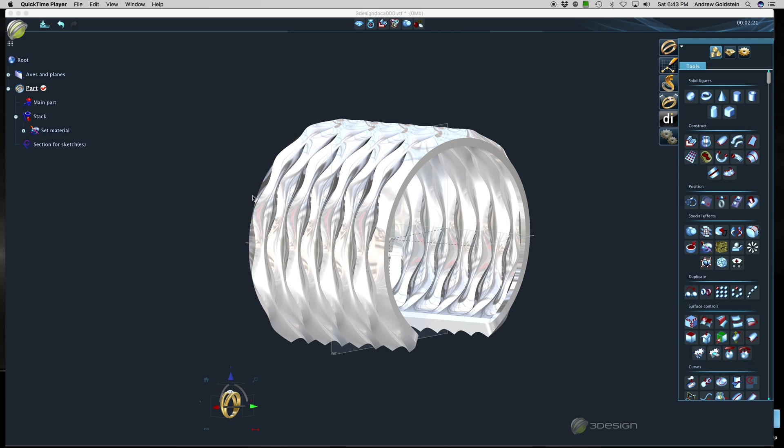Andrew from Zina Sterling Silver, and you're looking at a cuff from my latest Desert Wave collection. This has been created exclusively in 3Design and printed on the Formlabs 2 printer and then cast here in my factory. So I'm going to show you quickly how I made this.

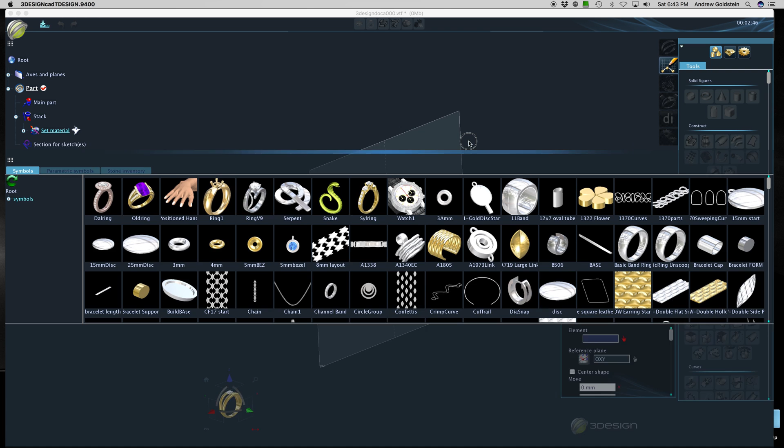Let me go ahead and hide this. I like to work in 3Shaper, so I will do most of the demonstration in shaper, but first I have to create the bracelet. The way I did that was I already have a bunch of these symbols. This right here is called cuff rail, and that's basically a line that shows me the dimensions of the bracelet that I want. But this is laying flat on this plane.

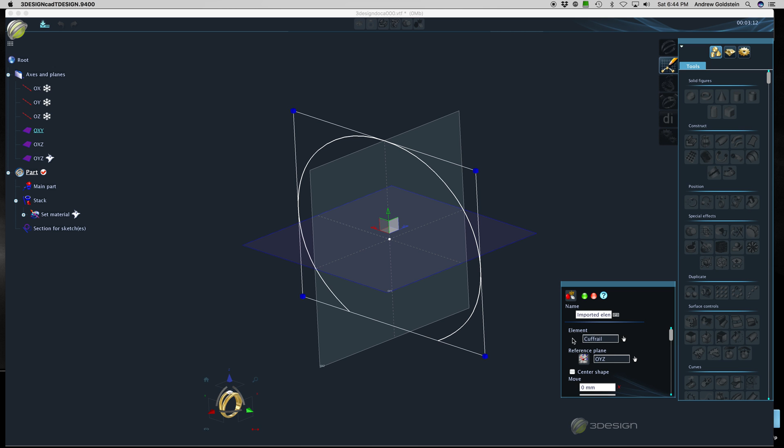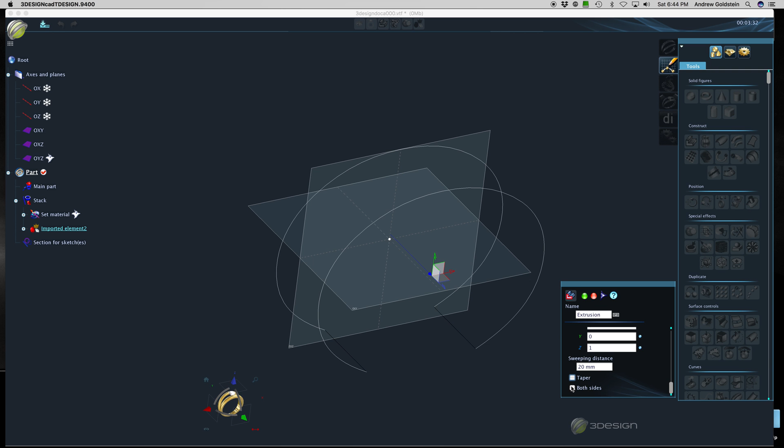I don't want it in the OXY plane, so I'm going to choose a different plane. If I open my axes and planes here, I'll put it in the OYZ plane. Now you can see it's in a different plane. So here's my cuff rail, and I'm going to extrude that to be 40 millimeters wide, but I'm going to do 20 millimeters and do it on both sides, so that way it stays true to the center of the 3D universe. You can see that by the plane right here that's bisecting the curve. So this pretty much resides at 0, 0, 0, which is the center of the 3D universe.

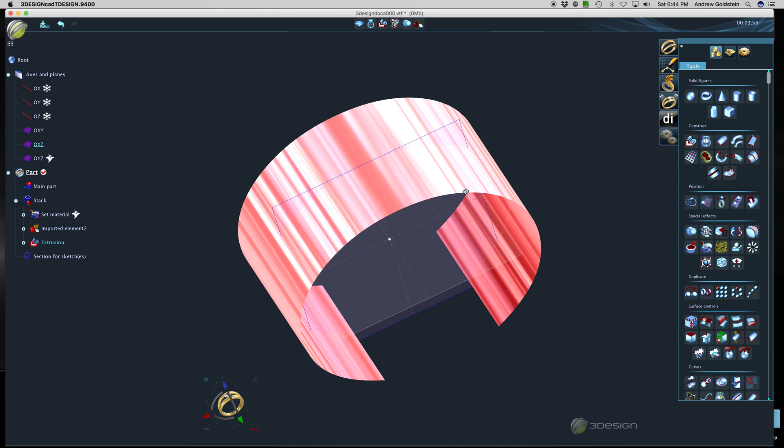So if we do anything to it, that helps with keeping symmetry and things like that. So anyway, this is a surface. There is no depth to it. It can't be printed. It's strictly a surface.

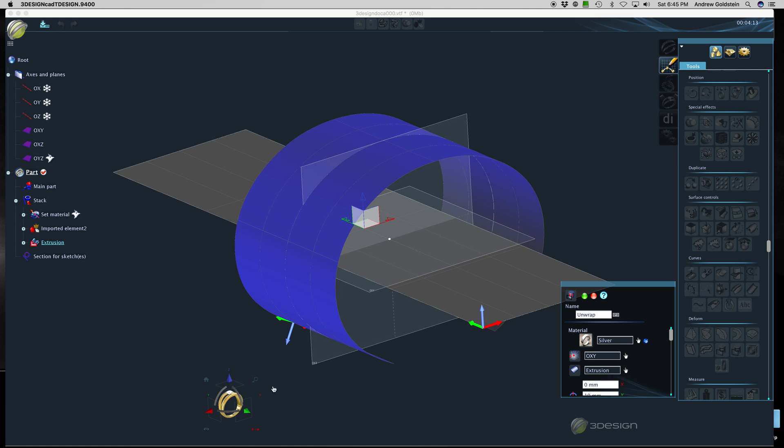What I'm going to do now is unwrap that surface using my UV unwrap tool right here, and basically it takes the round. I'm going to center it again in the universe. I'm going to rotate that 90 degrees so it lines up with the piece as I'm looking at it. And basically now we have an outline of what you can see.

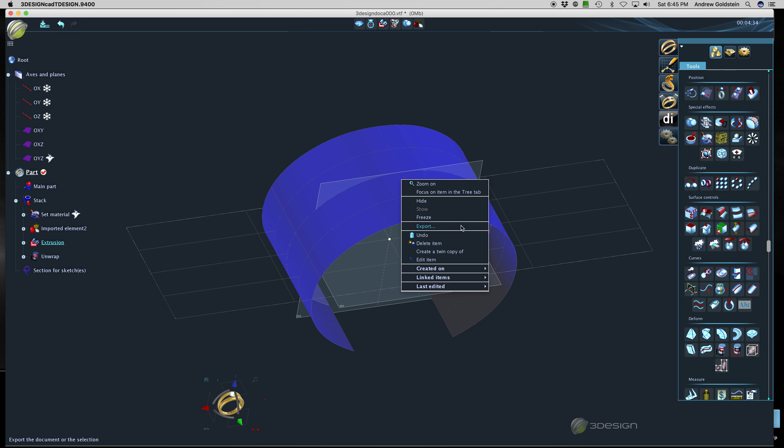I don't need this extrusion anymore, so I'm just going to go ahead and delete that item, and my unwrap will stay. What I'm also going to do is turn off my planes by hiding them. I don't like to see them because it kind of messes me up a little bit. The less that you're looking at on the screen, the better it's going to be.

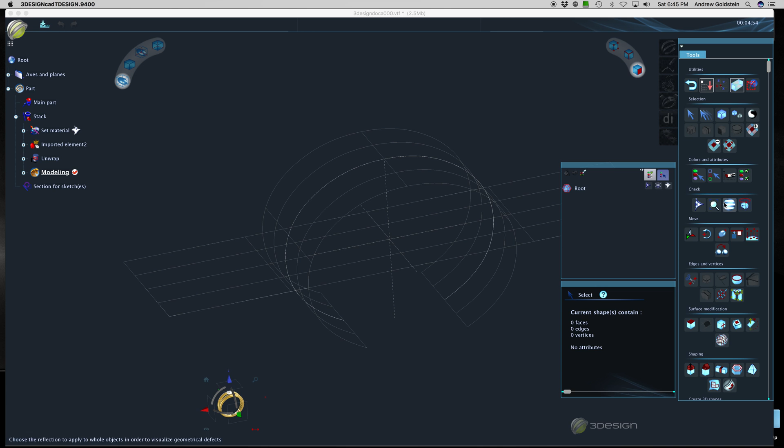So now what I'm going to do is go into shaper. It gives me all of these tools here on the side. What I'm going to do is create a box. I already know that the box is -- well, now that's on the wrong plane. We'll put that... okay, now there it is. So we've changed the orientation plane that it's on.

And I made it specifically 10 millimeters long, 4 millimeters wide, and 1 millimeter high. This is strictly to show you how I make the pattern. This is obviously going to be too small to make the bracelet.

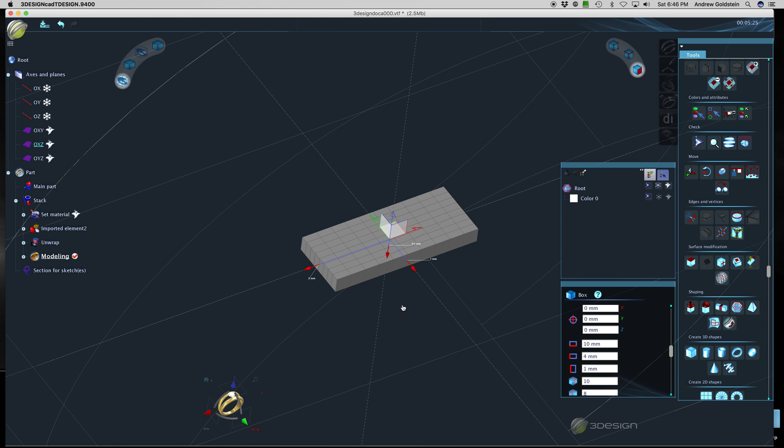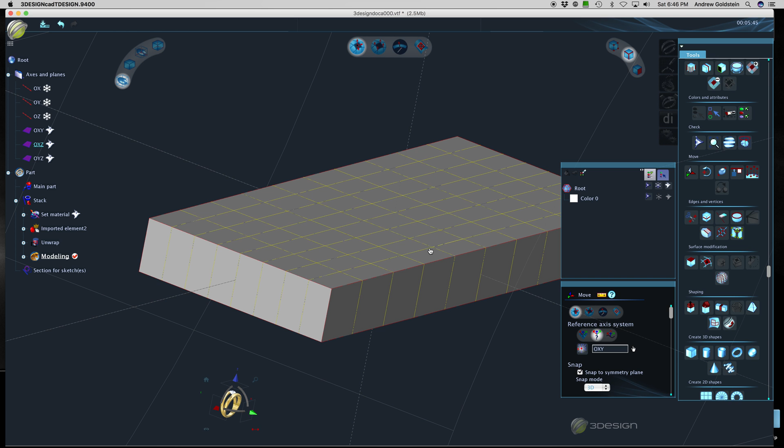So here what I'm looking at is there are 3 modes. This is where you can look at surfaces right here, this square. Here is where you can look at edges, and what you can see here is that some edges are red and some edges are yellow. That tells me red edges are hard, yellow edges are soft, and then here this is points. And this is a shaper tool, and you'll see why I like that in a second.

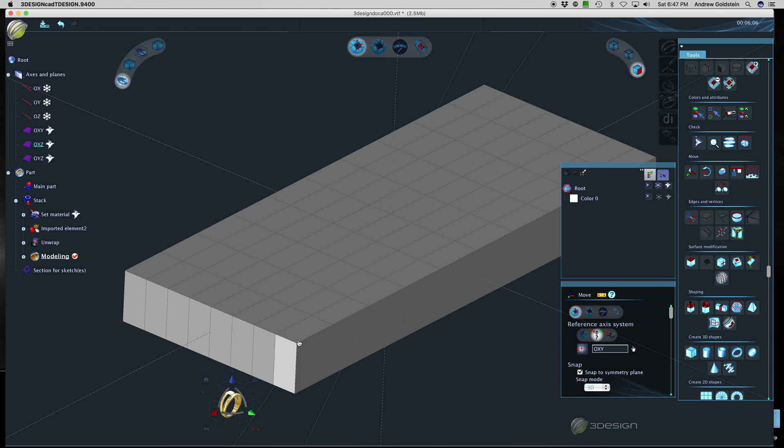So what I'm going to do is I'm only concerned right now with the top plane. Basically what I want to do is get the rest of it out of the way. So what I like to do is take this top plane, choose all of the little squares here on the top plane using this multi-choosing tool. And I'm going to add a color to that. I'm going to make that yellow for the time being.

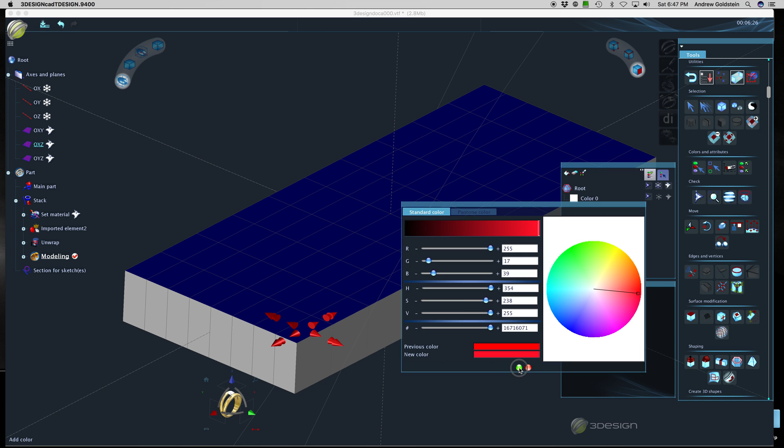Actually, you know what? I'll keep it red. So now you can see when I click off it, the top plane is all red and everything else is this whitish gray color. That allows me to turn off the whitish gray, and then any tools that I use will only affect whatever's visible. So now what you can see is, even though it'll be red on red in a second, all of these lines, these edges, are yellow, which means they're soft. Well, in order to create this pattern, I need to start moving some of these around.

So what I'm going to do is double click here, and it's going to choose the edge all the way across. Then I'll hold down my command key and double click this one, and this one, and this one. So now I've chosen every other line.

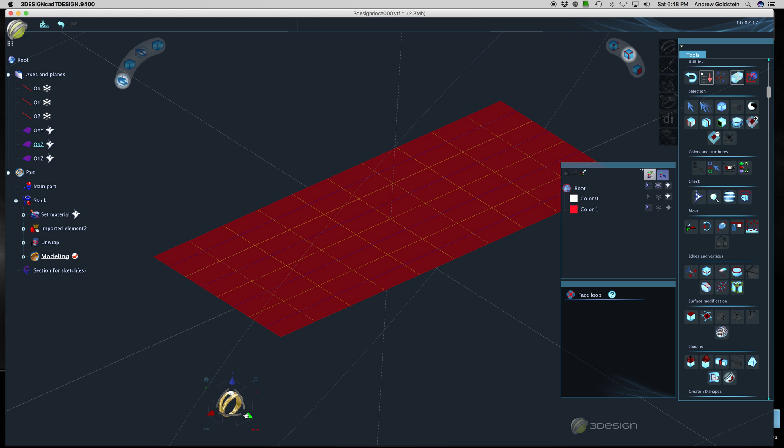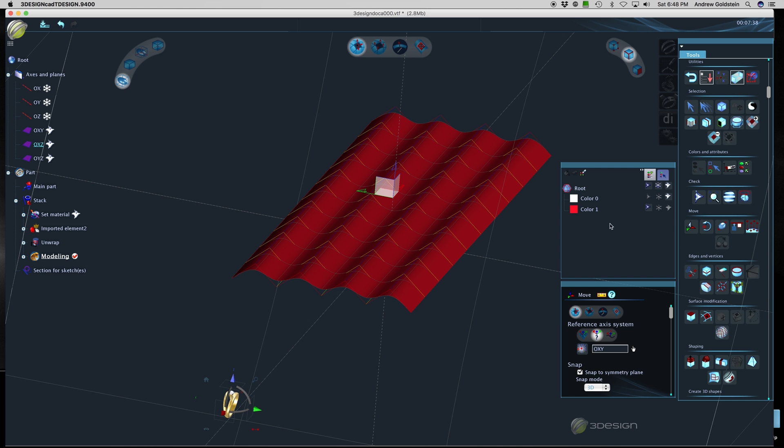Now I'm going to go to my side view. It doesn't look like anything, but once I turn on my move tool, I can actually move just those lines that we've selected up. You can see they're kind of bumpy now because the lines in between every other line have been raised off a different plane. If I turn back on the white, you can get a better idea of what's going on. But these are still active selections.

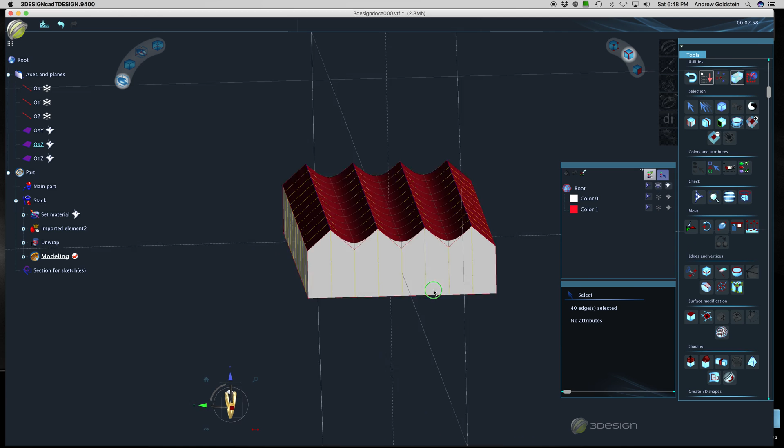There's a tool right here which is create sharp edge. I click that once, and now I've got these nice sharp edges. So that's step one of creating the desert wave pattern.

Step two is now moving the points. I'm going to look directly from the top. What needs to happen here is I need to be able to create the waviness. So the way I do that is I select these two points here, holding the command key down, and then I skip over every other set of points. Once I have all of these chosen, now I'm going to use my resize tool, which is right here in the middle.

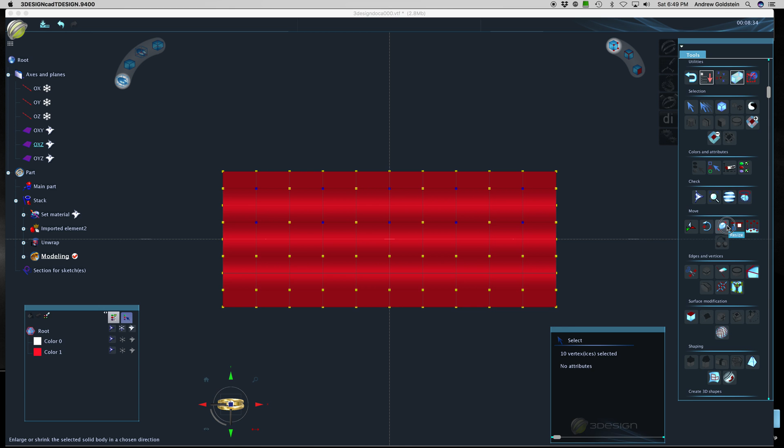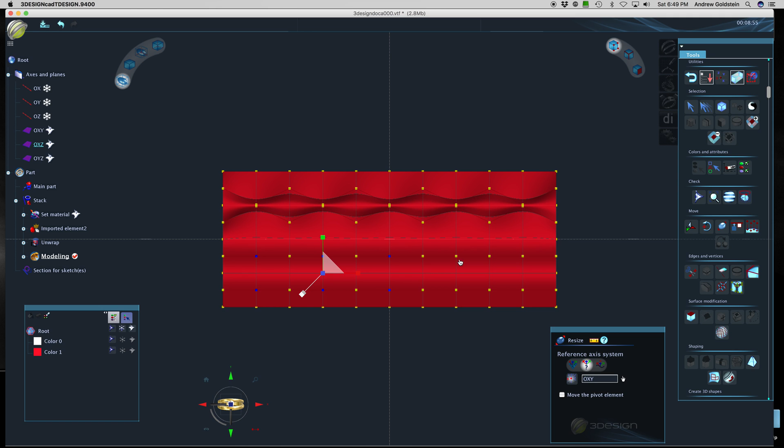This green toggle will only move them in the up and down position, and I bring that in. You can't see it well, but I click on it and drag down, and that brings those points together. I'll do the same over here, holding the command key down and skipping over every other one. Once I have them all selected, I'll click the green toggle, drag it down, and bring those together. Now I go back over to the ones that were skipped previously, click on those points, grab the green toggle, and bring them together too.

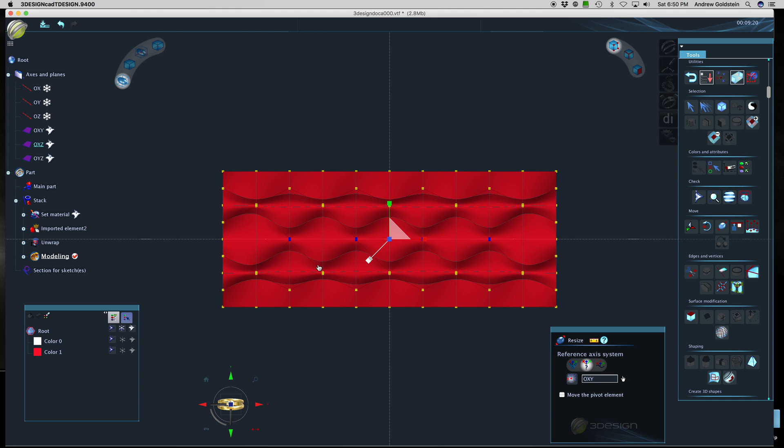Now for the points here, because this obviously doesn't look like the full pattern yet, I'm going to change the tool and go to my move tool. For the outside, I'll click these four points and move those in this direction, then create the same on the other side.

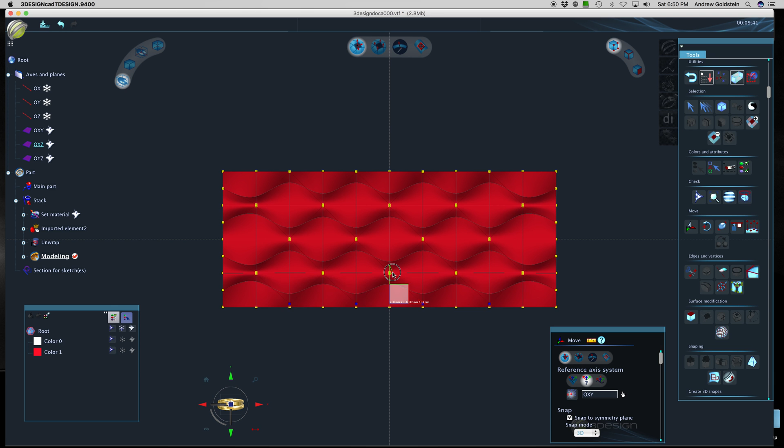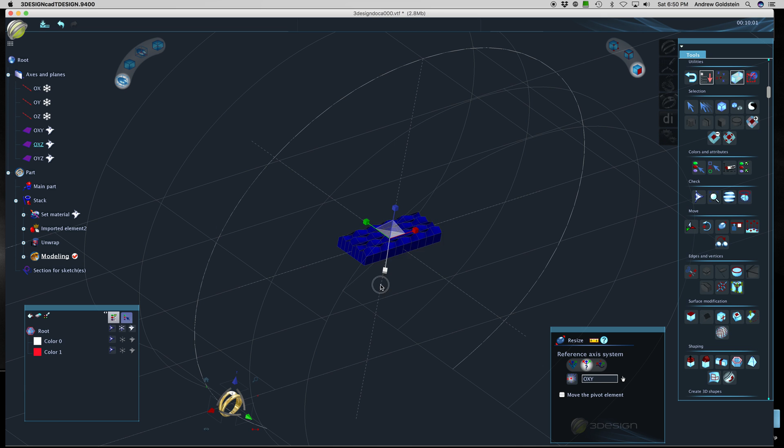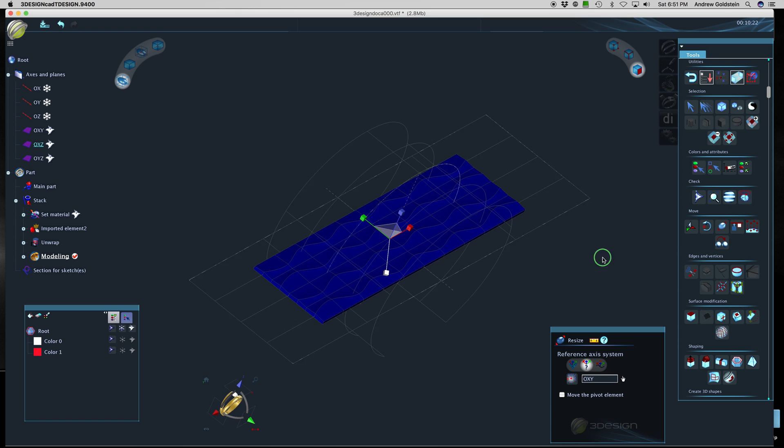If you wanted to create a bigger piece of this material, there are many ways to do it. You could make a much bigger piece of material, or resize what we have right here. For instance, if I choose the entire piece, you can see the resize tool. Using the white handle does everything in all directions, but let's say I didn't want it any thicker, I just wanted it larger. So I could drag the green this way, and the red one this way, and that way I'm making it bigger but not necessarily thicker.

If I click off that, you'll see what happened there. So that gives you an idea of how that works. That's how I created the piece. I'm not going to go ahead and create the whole thing again.

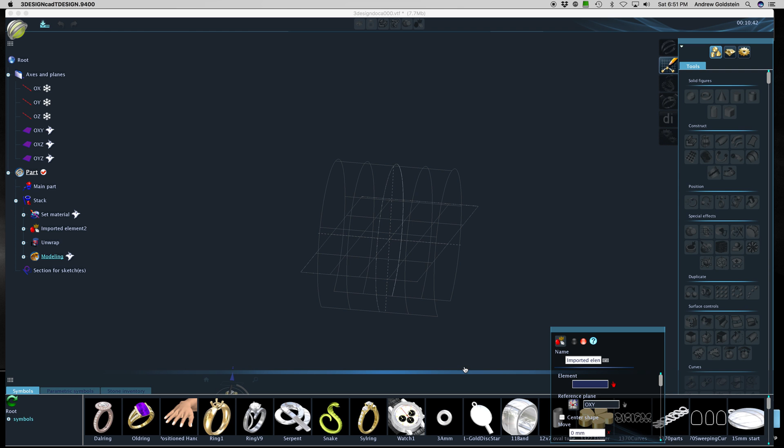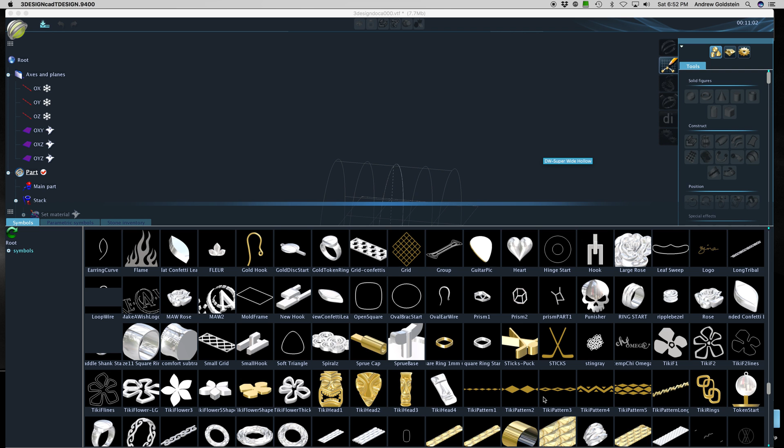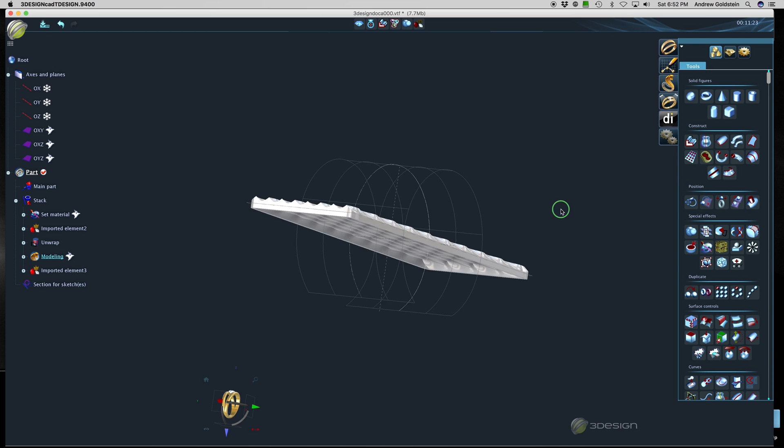What I did was create that piece before, and here in my symbols library, I'll just go ahead and pull that out. We need to find it, of course. And here it is, called wide. This was made basically exactly how we went through, except I actually spent the time to hollow it out underneath.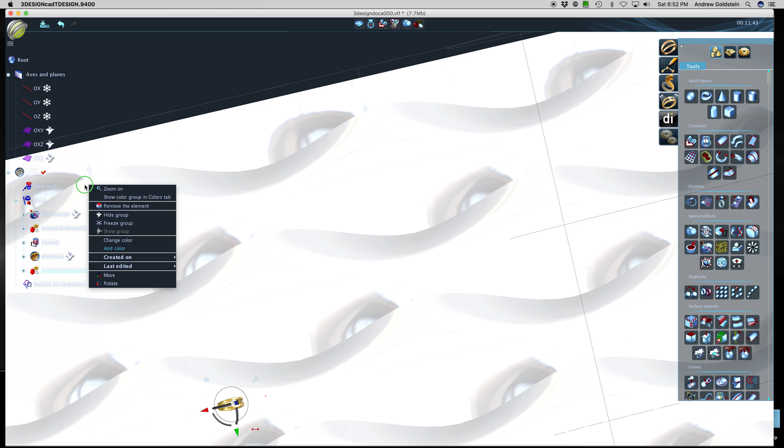But basically what I have is the piece the way I created it. It is the exact same size as my unwrap, and it actually needs to be within it, or slightly overlapping. You can see right here this little white line around the outside, that is the border of the surface.

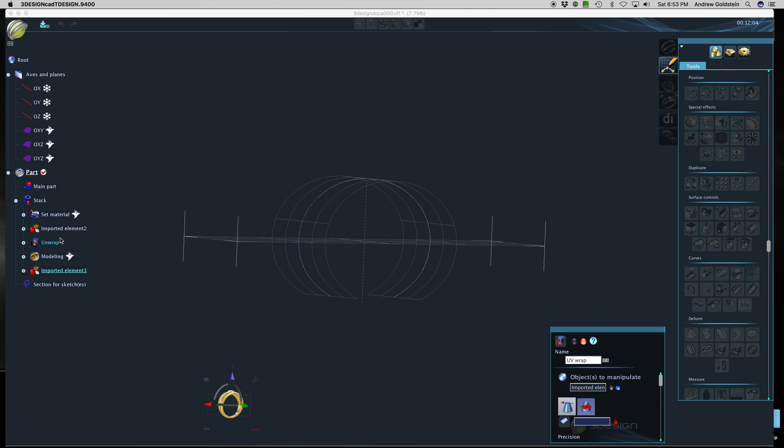If this extended over the border, the wrap wouldn't work perfectly. But anyway, now we will take this surface that I created and go to the wrap tool, which is right here. I click wrap, and then choose the unwrap that I'm going to wrap it back around. Because this piece was created in Shaper, it wraps perfectly to the surface and is structurally sound. It will print perfectly.

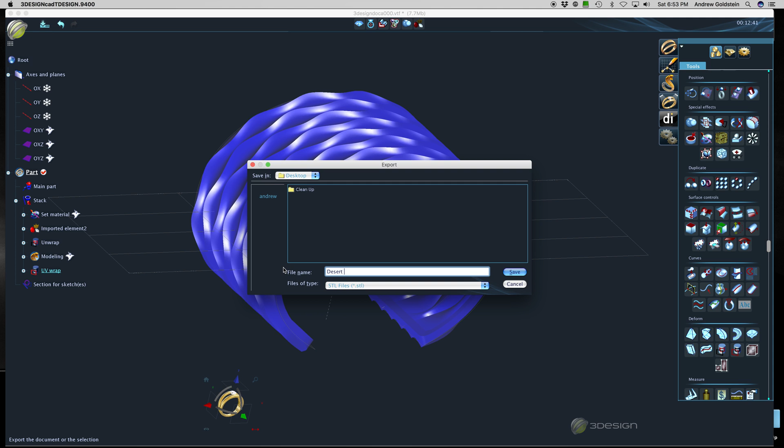Then what I will do is export that, and I want to export it as an STL. I'll choose my location, putting it on the desktop, and I'm going to change the name of the file to my Desert Wave Cuff. And save.